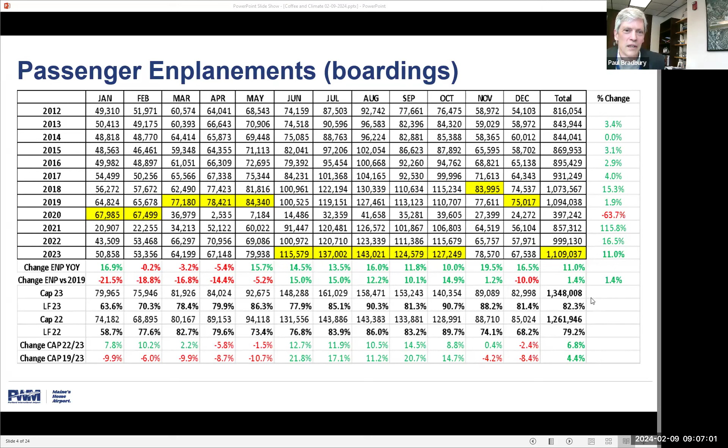Just to hit really briefly, this is 2012 to 2023, and it shows highlighted all-time record passenger volume months. So what you can see here is that in 2023, we indeed hit an all-time record of 1.109 million boardings. So that's an enplanement or a person getting on an aircraft out of Portland, and hit all-time records for June, July, August, September, and October in 2023, which made up for a less than stellar first quarter, which you can see in some of these red numbers over to the left-hand side. So made up for all that and still came in with a record year, up 1.4% actually over the prior record of 2019. So just to give you a little bit of where the passenger volumes are.

And here's an interesting chart that whenever I talk about aviation in Portland, I like to show. Back in 1997, we peaked on our number of takeoff and landings out of the Jetport at nearly 129,000 takeoff and landings. What this chart is showing is passengers getting on and off an airplane. So we only had 1.2 million passengers way back then in 1997, and now we're over 2.2 million. But our number of takeoff and landings has gone from nearly 130,000 down to just under 54,000. And everybody can say, wow, how is that possible, that we're doing so many more passengers on so many fewer flights? And the answer is planes have become much bigger for our market.

It's called the upgauging of aviation. So we have fewer larger aircraft, A320s and 737s, which are much quieter and much more fuel efficient, carrying way more people than they did back in 1997, when we may have had 30 and 50 seat aircraft that simply don't exist anymore. So now much more fuel efficient. And in that earlier chart, I won't go back, but very high load factor. So the planes are very full. In fact, for a couple of those record months, we were over 90% full on all of our flights on average. So you can just imagine how full these planes are.

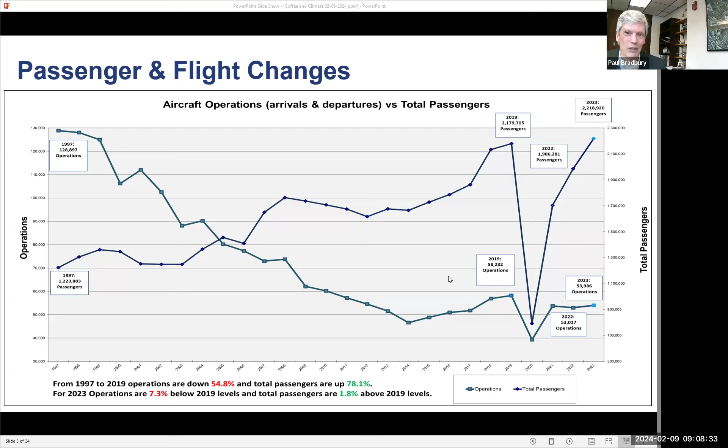So moving along, one of the things that got the terminal to achieve LEED Gold was a geothermal system that we were able to do during construction, make a quick turn, and with some help from a program with FAA that Congress worked through the FAA grant program. It was called a Voluntary Airport Low Emissions Grant, or VALE grant, which helped us to fund it, and we did it kind of midstream during construction, but a geothermal system.

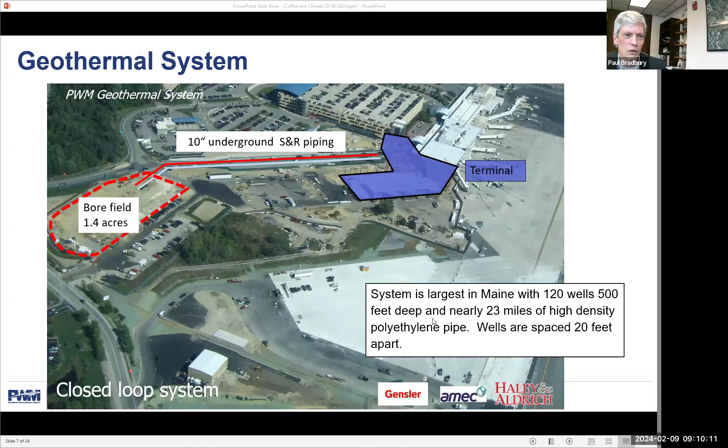So here, let me just bring these all up. So from the terminal, that in this picture was under construction, we brought 10-inch underground lines all the way to a bore field, which is under what is now, and you'll see in later images, our employee parking lot. I believe it is still the largest closed loop system in Maine. It has 120 wells drilled 500 feet deep and nearly 23 miles of pipe, and it does heat.

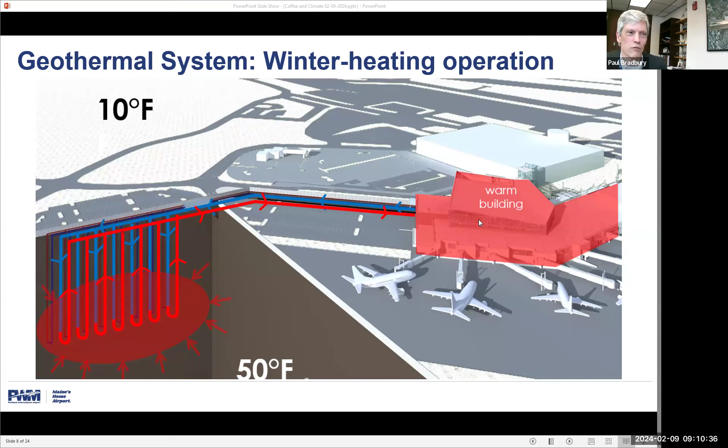So here's a heating kind of view. We take thermal energy, with the ground temperature being 50 degrees, and a little more on that in just a second, and an outside temperature in the winter of 10 degrees. We're taking thermal energy from the ground and just using a heat pump, kind of the reverse process of your refrigerator at home, and moving that thermal energy into the building. And in the summer, we do the reverse. We take the heat out of the building and transfer it to the ground.

And those wells, if you look at an air-cooled engine that has cooling fins, those closed loop wells are really just cooling fins in a way, drilled down into the earth, 500 feet down and back in the pipes. So we're not taking water out of the ground or putting water back into the ground. It is closed loop. So those pipes are really just thermal energy transfer fins into the ground, which we can say is a roughly average 50-degree ground temperature. But the reality is that it varies.

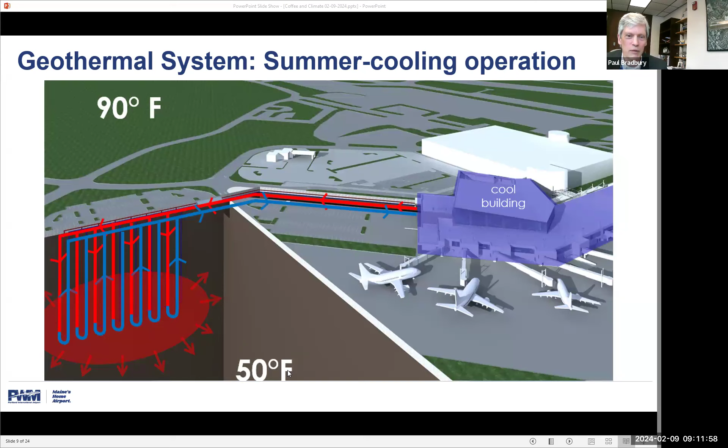By the end of our heating year, this temperature is down around 38 degrees when we start air conditioning in the summer. So we actually are getting 38-degree water out of our bore field when we start our first air conditioning, often in late April. We'll have one of those warm days and be starting to air condition, and we'll be taking really cold water and have to do no compression to start cooling the building. And then the reverse process: by the end of the summer, this ground temperature is actually up to around 78 degrees when we start heating, almost a good enough temperature to put right into the warm floor system.

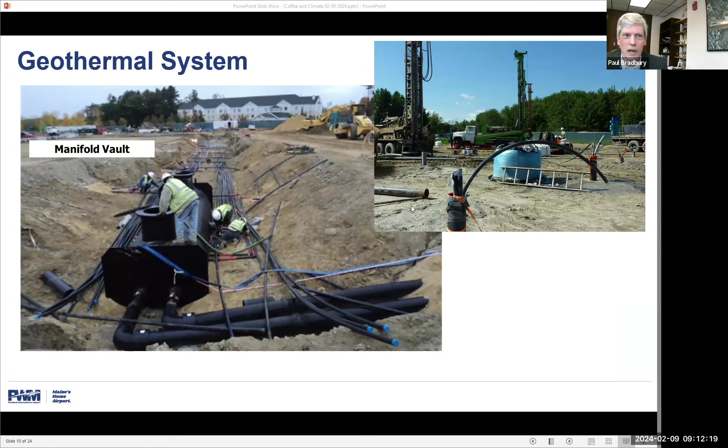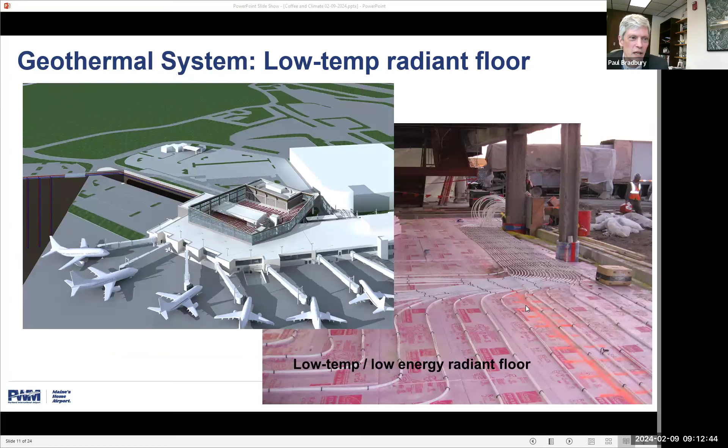So this is just a couple pictures of that construction, the manifold vault, all of these pipes going out to the individual wells. Well drilling, it is the same kind of drilling rigs that are used for artesian wells throughout Maine, so it was a great application here. We had multiple well drillers going for a long time during construction. And part of how we put the heat into the building isn't through high temperature, because you don't want to use more energy to get a really high temperature. So using a low temp radiant floor, 90 degrees, through all of those concrete floors throughout the expanded terminal, is how we transfer that energy into the building and heat the building.

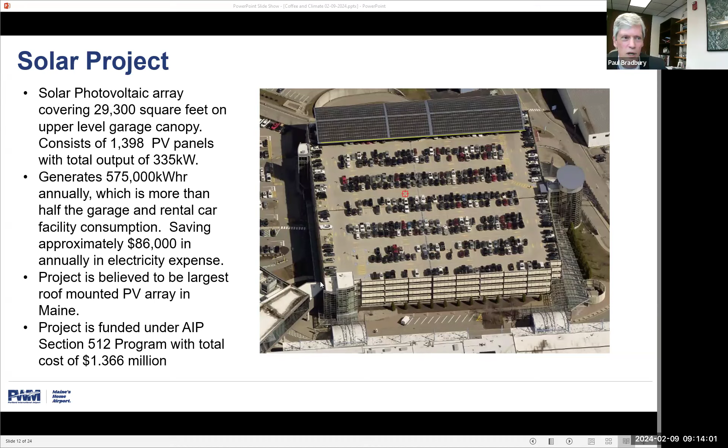So that would be the equivalent of 575 megawatt hours annually. Then I'm trying to move on and make sure I have plenty of time for questions.

So I wanted to switch to our next topic of sustainability, and that is our aircraft de-icing fluid capture. This is the original de-icing pad that we had built back in 2010. In another slide, you'll see it's growing. We used to de-ice our aircraft at the gates. So when an aircraft was at the gate, it would be de-iced.

The aircraft de-icing fluid we use is a propylene glycol. It's non-toxic, but when it's discharged into the environment, it does take a high amount of oxygen to dissolve. So it has a biological oxygen demand. If it's in any stormwater, it will absorb oxygen out of that water. So if you're pushing into a small tributary, it would absorb oxygen that would otherwise be used for fish and other aquatic life. So the idea here was to capture it.

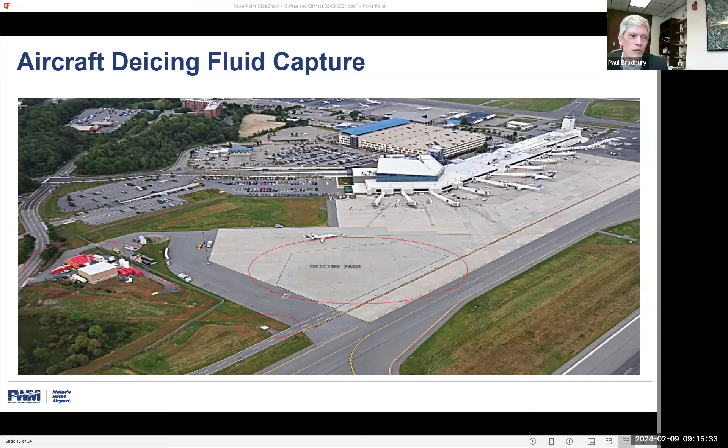So we have this central de-icing pad that's all pitched to drains that then go to a valve box that we can then transfer into a 500,000 gallon underground tank. It's actually a multi-chambered cast-in-place underground tank that has two 250,000 gallon chambers. And then we constructed this processing building here, which is staffed and designed by Inland Technologies, which is our partner in this. As we moved along, I'll go down through the timeline. So that was in 2010.

The system included 3 glycol concentrators, which take this feed from the apron, clean it, and get it to a 40 to 50% fluid. Then it uses a distillation system, which we installed later, to go from 50% up to a final 99% pure glycol product. And originally we were just selling it back as a commodity in the industrial propylene glycol market. So we were capturing it, recycling it, and selling it on the standard market as an industrial propylene glycol that can go into anything, antifreezes, hydronic fluid, like for our warm floor or snow melt systems.

But that wasn't creating the value that we were looking for. It's kind of like having wood pulp as opposed to a finished chair. So we wanted to go for the finished chair, which is the final ADF. So in 2016, we expanded the facility, added blending equipment, and Inland Technologies was able to issue and sell for the first time an ADF, aircraft de-icing fluid, completely FAA certified and produced on site, meeting all FAA's requirements and able to be resprayed on planes right here at the airport.

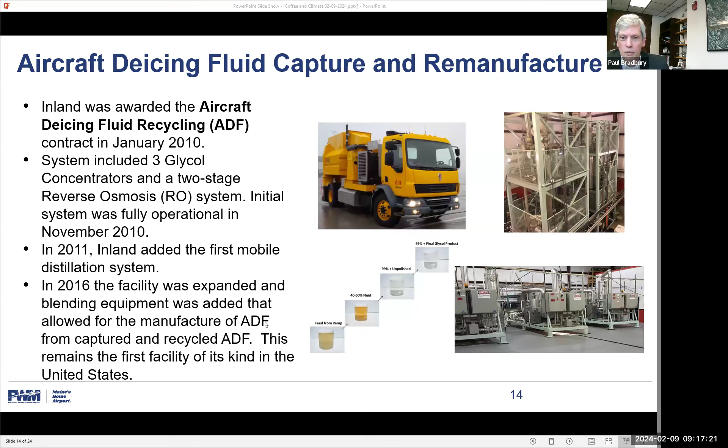And it's really surprising to me, and it's probably because the EPA still has not required this to happen. ADF capture is still not required by the Environmental Protection Agency. So still, even today, many airports do not collect and capture their fluid. But in time, this is where the industry is going, and they will.

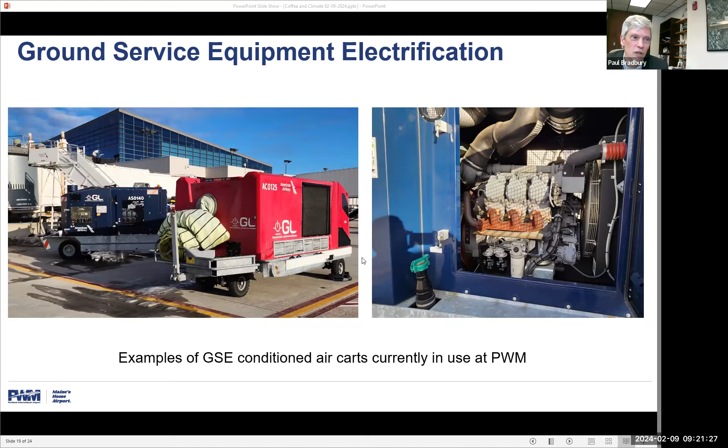Those new passenger boarding bridges will have this, and we're hoping to tie them possibly even to our geothermal system; if not to that, they will be electric heat pumps. So we'll be able to air condition and heat the planes with electric heat pumps tied to the passenger boarding bridges.

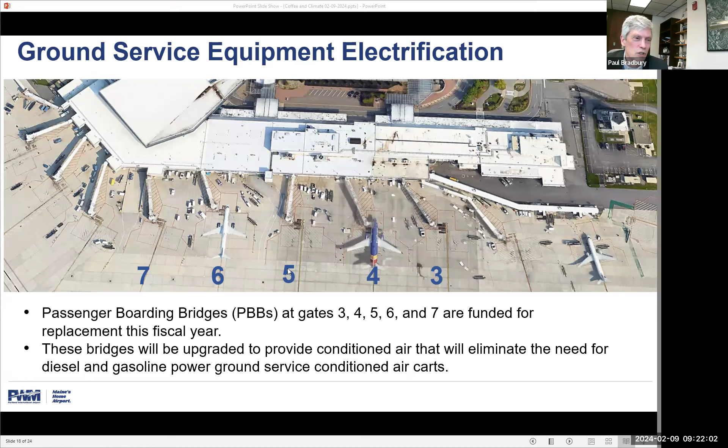If you look, we have gates basically 1 through 13, but we've labeled that 13 as a 14. In the future, it will actually be renumbered 13. We're not that superstitious, but we're looking to make that move so that every gate will have conditioned air. But in the initial rollout, it will be these first 5. So this is already funded, and we're already in design for this passenger boarding bridge replacement, which is just a huge next step in the electrification of ground service equipment.

The last project, which is just starting out, and this is the end, I hope I haven't PowerPointed you to death, is a battery storage project. What we're working on is another parking project, but we will have there a roughly tractor trailer sized battery. It will be 2 of them, a 1.9 megawatt, 5 megawatt hour behind the meter lithium ion storage. What it will back up is this portion of the terminal building, the brand new terminal delivered in 2012, and it will do a couple things.

So I say backup because it will help us with resiliency. If the power goes out, that entire 160,000 section of the building that is the geothermal heated and cooled section will be backed up with this battery system. But on the sustainability side, a more important component is that during the peak hours of the peak days of the year, we will be able to go off grid for a significant load for a couple hours to reduce the grid's total load, which means, if more and more entities start to do these, we won't have to have those peaker plants.

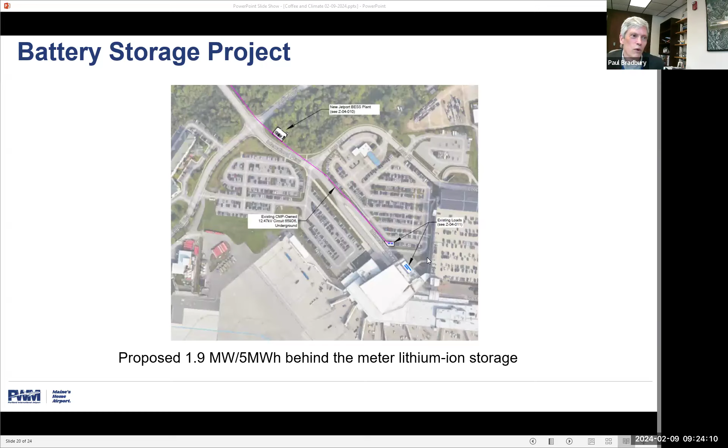Great. That was very interesting, Paul. I appreciate all those updates. One thing you didn't hit on too, and I know that you've been looking at some electric vehicles just for operational use. Can you tell us, I know you've got some trucks. Yeah, they weren't as aviation sexy, but they're still a great opportunity.

So absolutely, we've got now 3 F-150 Lightnings that we're bringing into the fleet. Their load profile works pretty well for us because our vehicles, from our operations vehicles to our maintenance vehicles, are responding to issues, but then they're often parked for long periods of time. And the great thing about these is it's all electric, so even the heating and air conditioning, right?

So with our PD vehicles, oftentimes you have to be in this position of idling. There's no idling on these fleets, and the load profile works well for us because they can be plugged in for the next shift, and then we can rotate them through. We also have a couple electric vans now on that side. And in the future, for our remote parking facilities, we'll be looking to use electric shuttles as well, but not in the initial. Right now, they are all unleaded and diesel.

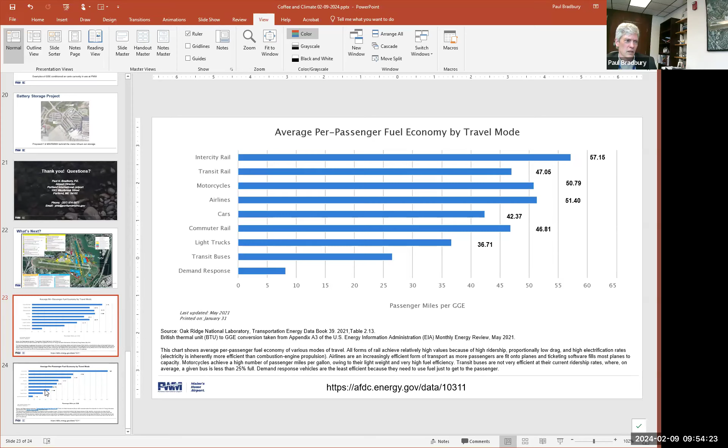So if we're walking... and it's the same for parking shuttles, right? You're running on a headway of 15 minutes, regardless of how many passengers are on the shuttle. Even if there's zero, you're still running because you have to run the shuttle service. So running shuttles is not green. So to the extent we can have... and I'll stop sharing again.

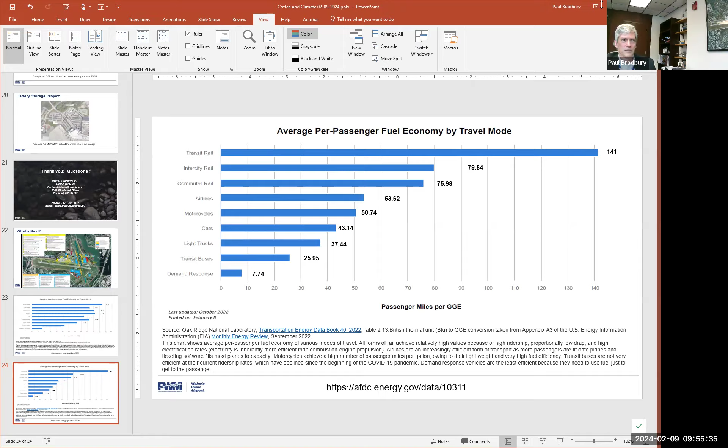So to the extent we can have density on site of our parking and our operations, and we can maintain walkable distance, it saves our carbon footprint. Even if there are electric shuttles, you still have to manufacture the shuttle. And if we can just have people walk to their parking and walk to the car rental facility, way better than remote in terms of the footprint for that shuttle operation. So I know that some may not recognize that, but that's the reason we're trying to do, instead of, you could call it airport sprawl, we want to do airport density.

Great. Let's see. Anyone else have another question? We have time for 1 or 2 more if people have them. And I just want to apologize. Awesome questions, and I apologize. Each question, you could do a whole PowerPoint presentation on most every one of these questions because they're so informed. I know. I always enjoy talking with you, Paul, because you can tell you're really passionate about the subject and you're really well informed, and I really appreciate that. So with a short time left, is there anything that we haven't talked about yet that you think we should know about, or what question you wish someone had asked?